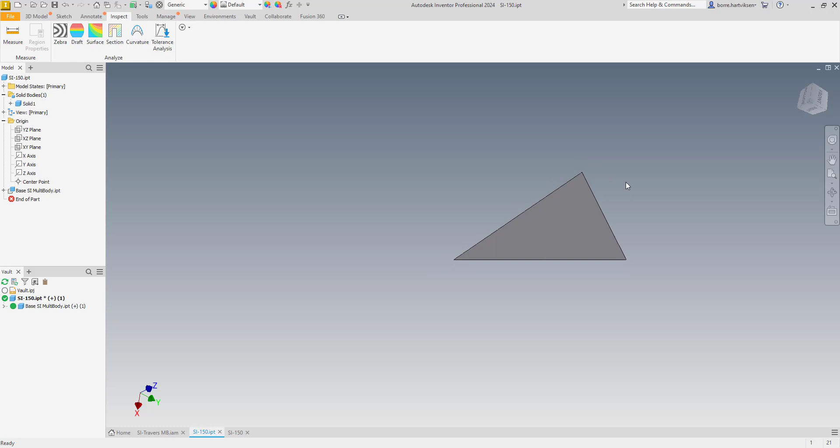This is a skeleton model, and we have just modeled things in it. Inventor really doesn't know yet what it is. So let's have a look at this plate here. When we look at it, we can see that it's not really aligned to any axis or work plane. It's just floating free. That's okay. We do not measure relative to any axis or work planes. We measure the real thing.

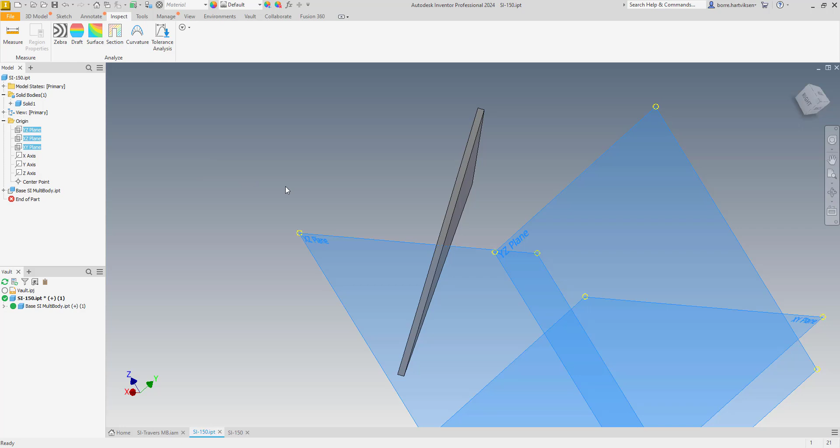So I start my Sovelia Inventor property editor, and I have to tell Inventor now, well, Inventor, my friend, this is a plate, and you see it now measures the plate as it is. We also can automatically measure many things. You see here, this is max length and minimum length. And we also measure in space, but that's not usable for us to really measure the size of the plate because it's not aligned to any planar faces. But it's measured if we want it to be measured.

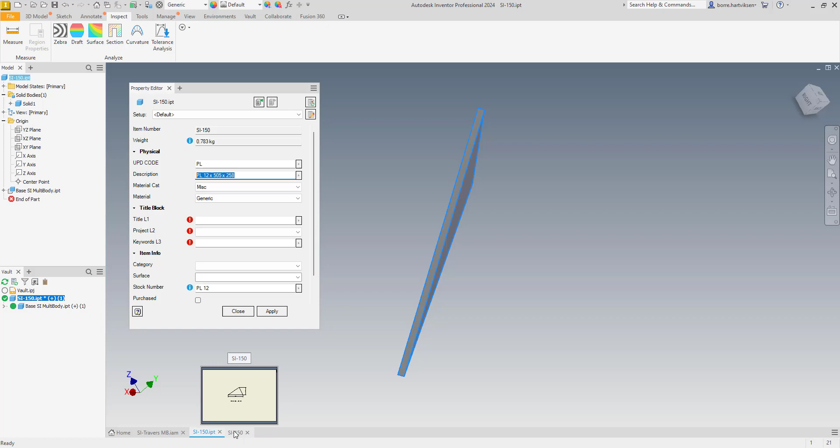So how do we measure this plate? Well, we are going to buy material to make this plate. So for this plate, you see we measure 12, that is the thickness, but then we measure this length, and this is how much material you need to cut this plate. So this is the piece size you have to cut this plate from. Of course, you can measure the area and so on, but this is how we have chosen to do it when you have designs like this.

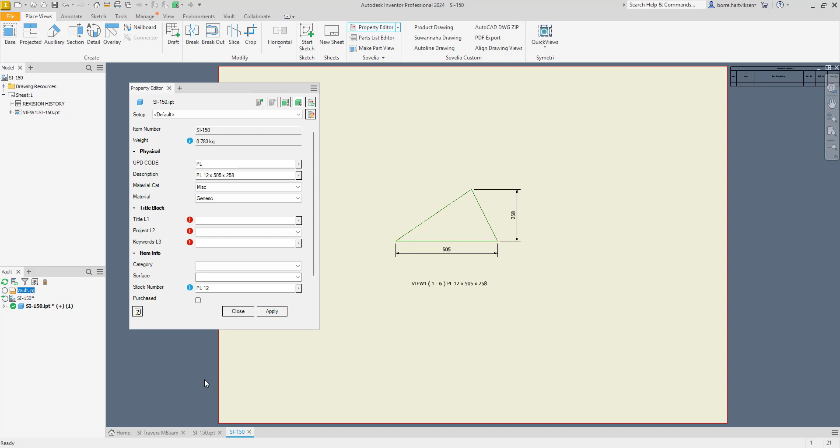Okay, so what do we do then? Let's go back to our model. First of all, we have to tell Inventor that all of this is plates. As we saw in the beginning, we have methods to go through a model and fix it, but this is plates. So let me start the property editor, select everything like this, and UPD code: everything now is plates. That's good. And then the description will be written from that.

I can add material, just steel. And I can add a title and call it plate, and add Symetri, and whatever. I can say this is SI traverse like this. Apply, and the category for this will be maybe laser cut for everything. So it's okay now. We just select purchase. It shouldn't be anything, so we just set that blank. Okay.

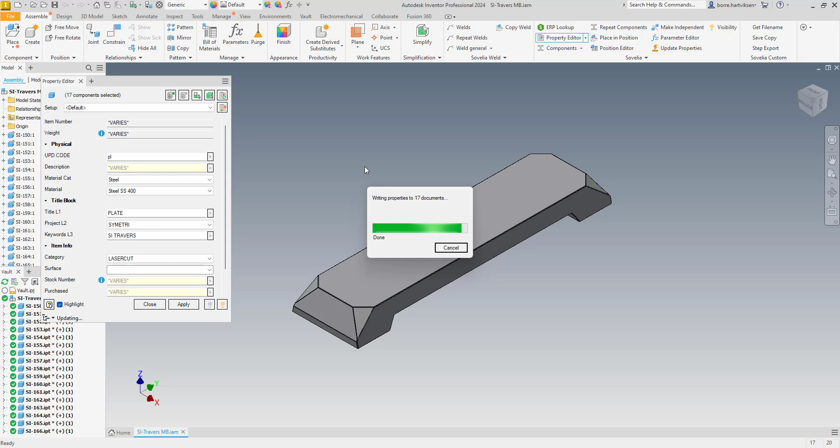And now Sovelia Inventor will add properties to all those documents and finish. Good. If you select the top, you see it's defined now: size, it's measured, and everything is ready to go.

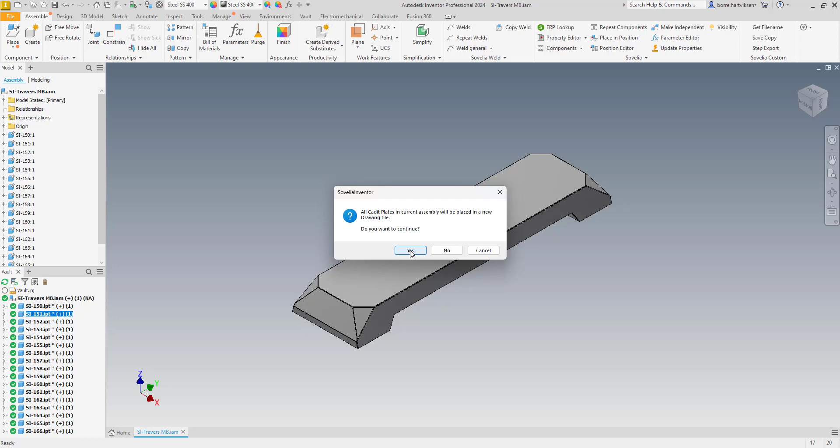So then I just start Sovelia Inventor draw plates, and it tells me it will put all those plates in a new drawing file. Press this and you see it starts to build this file for me. And you see what this does. It sorts the plates by material and thickness.

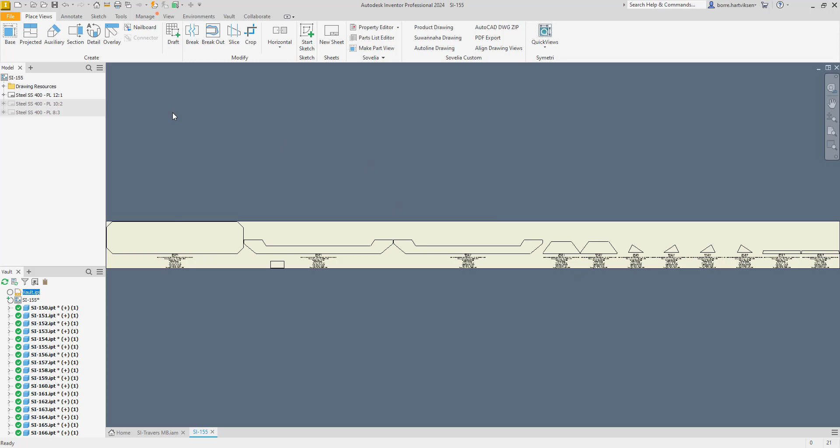This is 8 millimeter plate; it puts them in one sheet. 10 millimeter plates in one sheet, and you see you have information inside for each plate that you have created. So everything is defined and added into this drawing sheet. And now you can export it and do whatever you like with it. So this is one way of doing it. And of course, this can be configured in Inventor and this ini file.